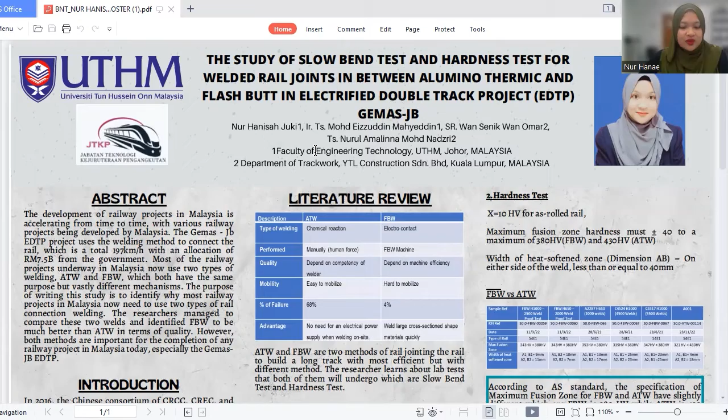First of all, I will start my presentation with the abstract of this project. The development of railway projects in Malaysia is accelerating from time to time, with various railway projects being developed by Malaysia.

The Gemas-JB EDTP project used the welding method to connect the rail, totaling 197 kilometers, with an allocation of 7.5 billion ringgit Malaysia from the government.

Most of the railway projects underway in Malaysia now use two types of welding, which are ATW and FBW, which both have the same purpose but vastly different mechanisms.

The purpose of writing this study is to identify why most railway projects in Malaysia now need to use two types of rail connection welding. The researcher managed to compare these two welds and identify FBW to be much better than ATW in terms of quality and time consumption.

However, both methods are important for the completion of any railway project in Malaysia, especially the Gemas-JB EDTP.

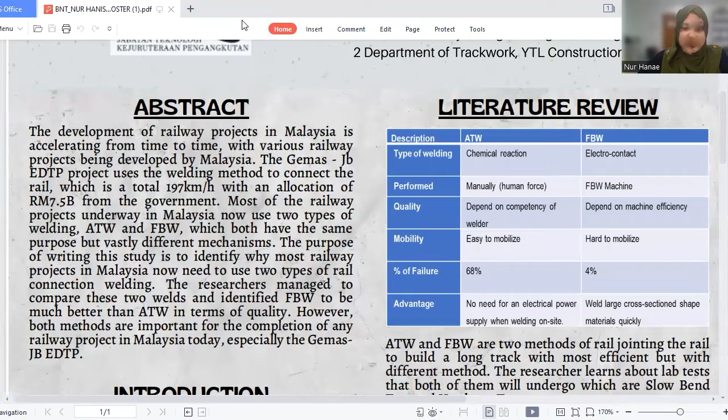Introduction. Nowadays, as for the transportation mode, there has been a move towards electrification as one of the main energy consumers, as electrical energy delivers a lot of environmental benefit due to the significant absorption of renewable energies in electric power systems such as KTM commuter.

In 2016, CRCC, CREC and CCCC won the contract to build Malaysia's first electrified rail link between KL and Singapore.

Electrical energy delivers a lot of environmental benefit due to the significant absorption of renewable energies in electric power systems. The Gemas-Johor Bahru line is the last piece of the current KTMB network to be modernized, and once finished, it will give a continuous connection from the Peninsula's Southern Tip to Padang Besar on the Thai border in the north.

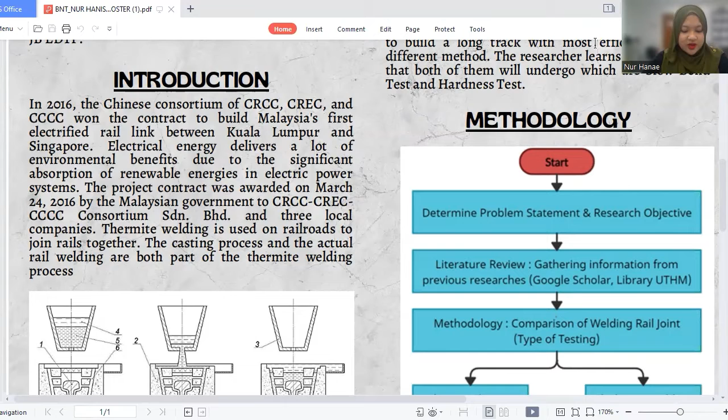The fundamental purposes of a rail in a track system are to provide a continuous, hard and smooth surface for train travel, to guide vehicle wheels along a specified track, and to sustain and transmit the load imposed by the wheel to a greater area of formation through sleepers and ballast.

Thermite welding is used on railroads to join rails together. The casting process and the actual rail welding are both part of the thermite welding process. ATW was a huge success from the start, known for its low cost. This technology is currently widely used for railway construction, maintenance, and modernization all over the world.

They have formulas to describe the extremely exothermic reaction between iron oxide and aluminum particles in alumino thermic welding. This figure shows the process of ATW: formation of the thermite mixture, pouring the molten thermite mixture into the mold, and lastly crystallization of the weld.

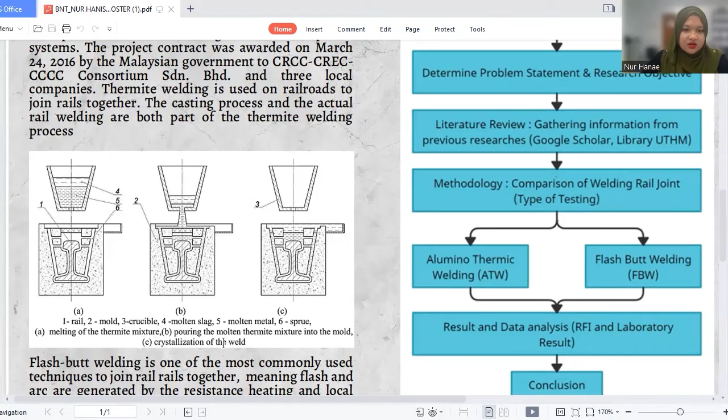Flash butt welding is one of the most commonly used techniques to join rail together, meaning flash and arc are generated by resistance heating and local heating caused by the contact of the rail. This contact electrification and flash generation is repeated a number of times until a melt layer is formed over the entire joint surface, and a weld joint is then obtained by rapid advancement and pressurization.

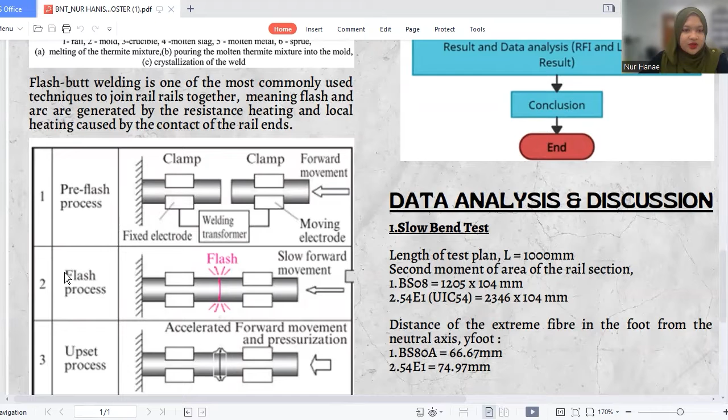This figure shows the process of FBW, which starts from the pre-flash process, flash process, and lastly the upset process, the accelerated forward movement and pressurization.

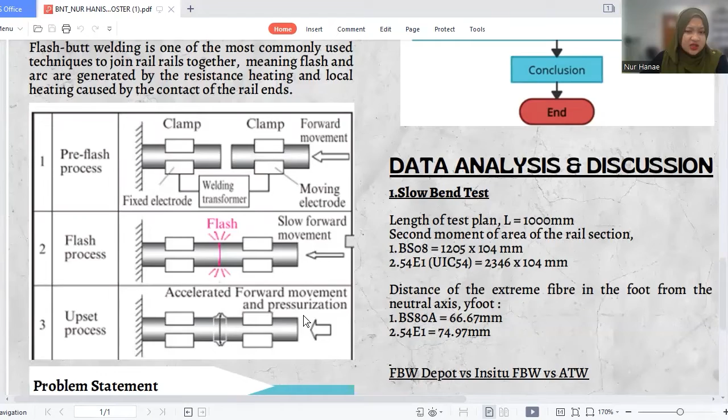Now we move on to the problem statement. Rail joint is the most important part in railway. Without better knowledge about rail joint, the excellence of the track may not be produced. There are various methods of the thermite welding process joint.

Types of welding that have been implemented in construction of railway nowadays include in EDTP Gemas-JB. There are two methods of welding that has been used in permanent track, which are Alumino Thermic Welding (ATW) and Flash Butt Welding (FBW). This paper is to identify why in this EDTP Gemas-JB project are needed two types of method welding rail joint to complete this project.

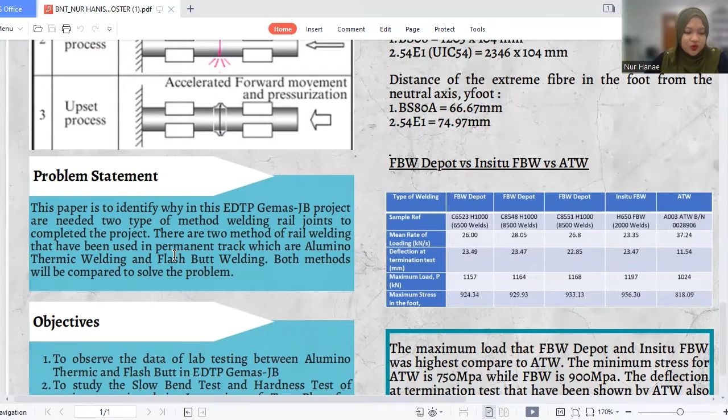Both methods will be compared to solve the problem. Now we continue with objective for the research.

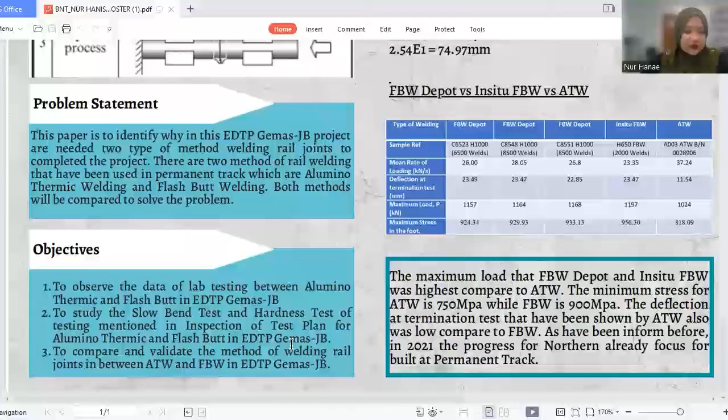First, to observe the data of lab testing between Alumino Thermic and Flash Butt in EDTP Gemas-JB. Second, to study the slow bend test and hardness test mentioned in ITP for ATW and FBW in EDTP Gemas-JB. And lastly, to compare and validate the method of welding rail joint between ATW and FBW in EDTP Gemas-JB. Okay, now we move on to literature review.

Literature review. A crucial component of the railway system is the rail joint. Local settlement occurs because the rail joints are less rigid and strong than the center. The rail joint must have the same qualities as the rails themselves in order to fulfill the purpose and provide constant performance. Alumino Thermic technique is used to join

lengthy strings of flash butt welded rail in the field, as well as to repair worn and broken rail, which is for maintenance. The welding is used on railroad to join rails together. Flash butt welding is characterized by a high stable quality of welded joint that are nearly equal in strength to the parent metal. This is the summary of the literature review.

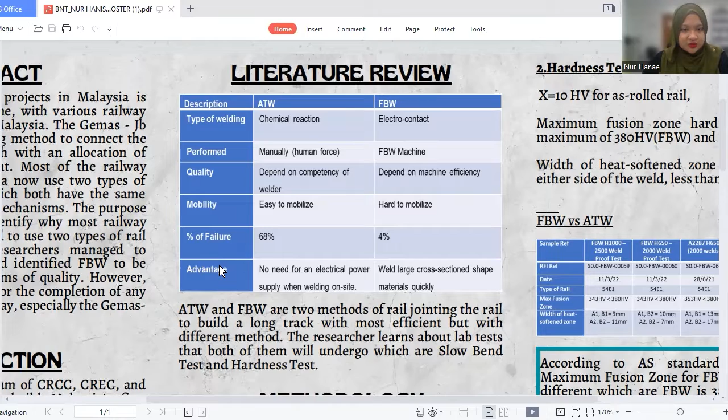I have compared type of welding, performance, how it performed, quality, mobility, percent of failure from literature review, and lastly, advantage. Based on study and research, both methods have the same purpose, which is to join the rail to build a long track most efficiently, but with different methods.

FBW had a lot of advantages in rail joint welding because it may weld large cross section shape material quickly, without the need for interface preparation, cleaning, and with adequate weld strength.

Before FBW existed or was used worldwide, ATW was the number one option for rail welding joint because the material for this method is easy to get and final cost for the welding is less expensive compared to FBW. It also needs no supply of current when the welding needs to be done on site. This method doesn't have any problem with any location the welder wants to weld.

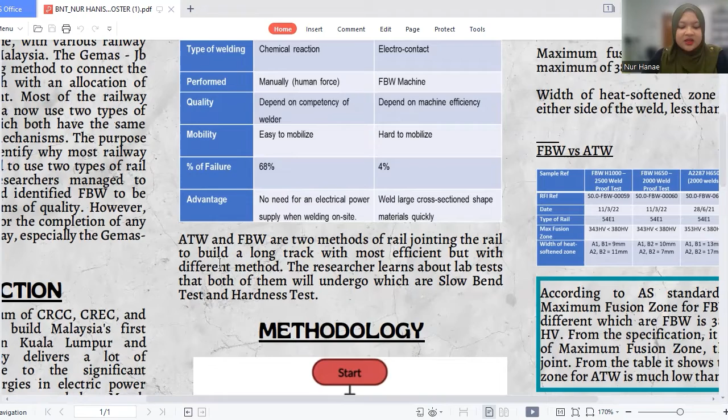To compare both methods specifically, the researcher learns about lab testing that both rail joint methods will undergo, which are slow bend test and hardness test. Both tests are included in test qualification for rail welding.

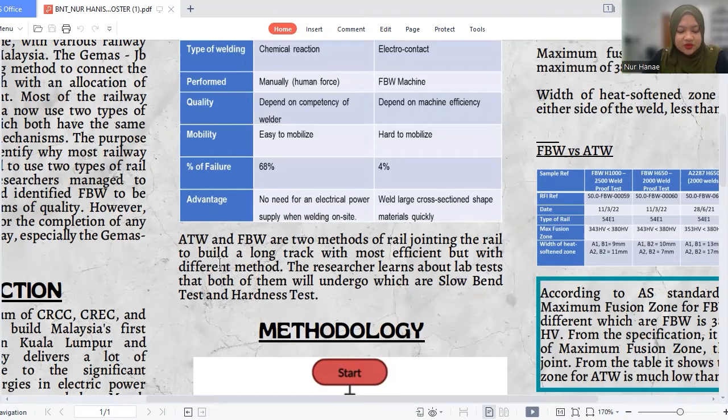Slow bend test is used to determine the quality of the railway, while hardness test is to determine the width of the softened zone and the maximum and minimum hardness in the heat affected zone and any asymmetry in the hardness distribution. Okay, next, now we move on to methodology.

Methodology will describe and discuss the planning and method of the researcher to gather the necessary data and information that will be used throughout the study. Here are my flow for my research.

The data of slow bend test that will be analyzed in this research are mean rate of loading, deflection at termination of test, maximum load, and lastly, maximum stress in the foot.

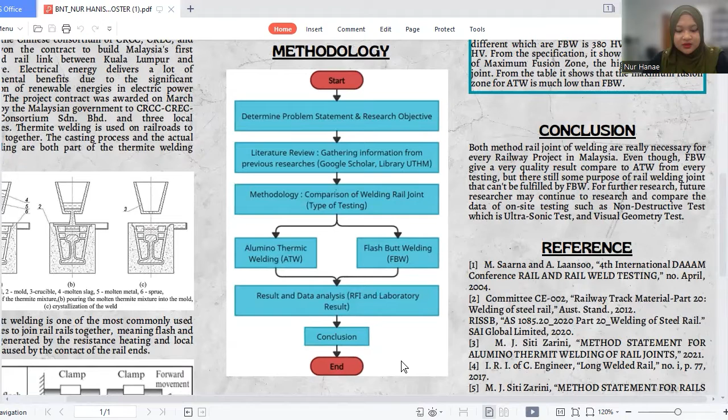As for hardness test, the data that will be analyzed is maximum fusion zone. The fusion zone is defined as the portion of the material that has melted. And next, width of heat softened zone.

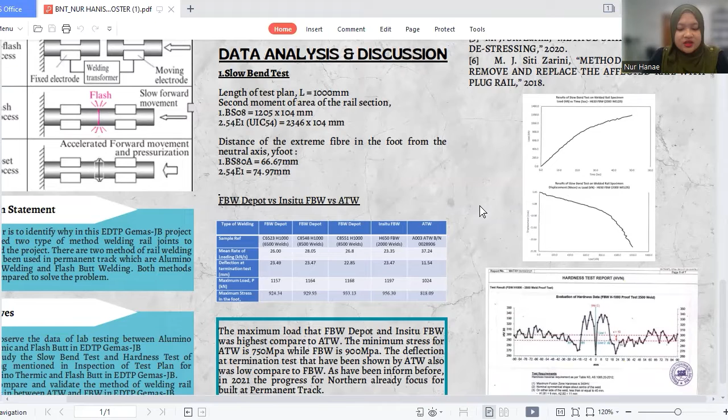Now we move on to data analysis and discussion. The data was extracted from RFI, which is request for inspection from this EDTP project. This research will only focus on permanent track since the northern area didn't do any ATW testing related to BS80A in 2021.

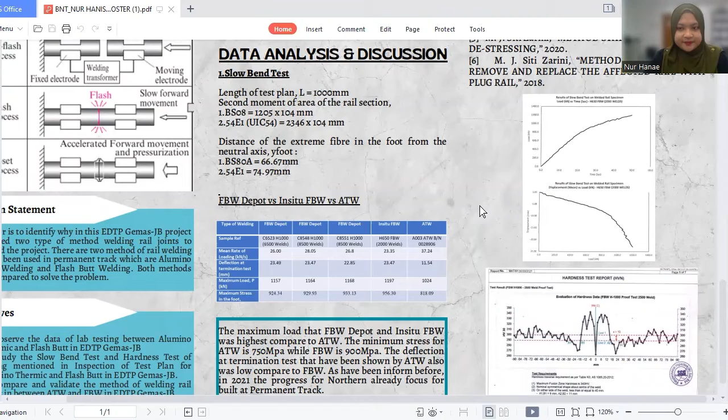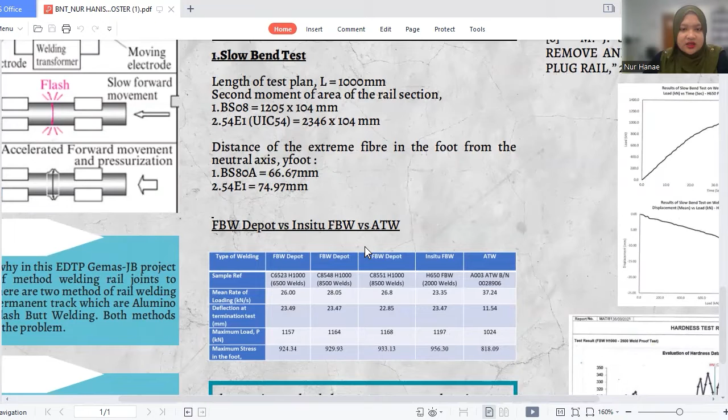The first, slow bend test. This is the constant for slow bend test according to Australian standards since we're doing joint welding for this project, use that standard. Based on the analysis here, clearly see that the maximum load that FBW depot and in situ FBW had the highest maximum stress in the foot compared to ATW.

The deflection at termination test was dependent on the maximum load that welding of joint can afford. The higher maximum load will produce higher maximum stress in the foot. Based on the standard, we can also compare that the requirement for minimum stress ATW is 750 MPa, while FBW is 900 MPa.

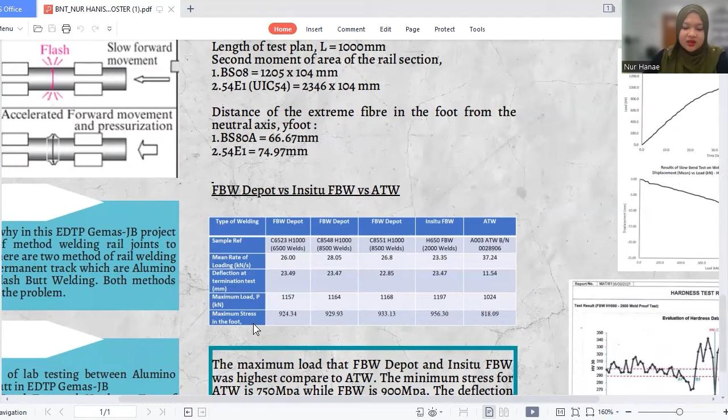It shows that FBW method is much more quality and long lasting compared to ATW. Okay, next we go to hardness test. In this project, there are several types of hardness tests involved for the qualification of FBW and ATW on site. The specification and qualification for this test follow Australian standard.

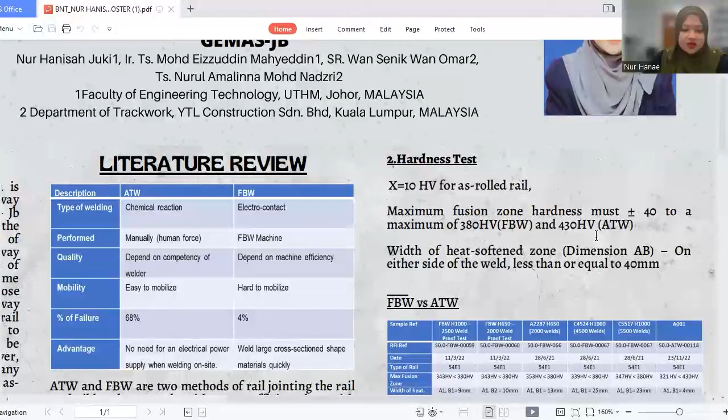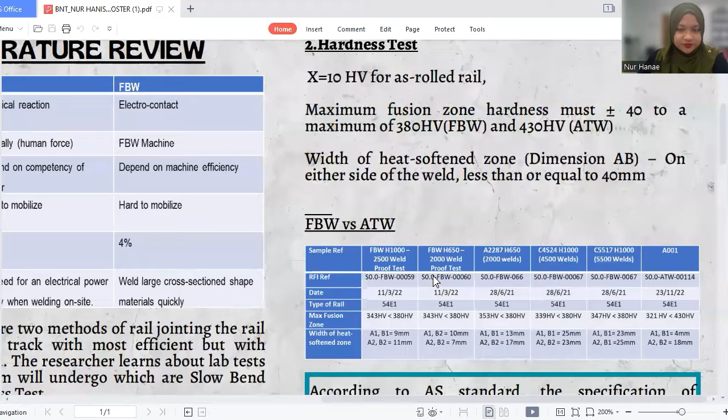According to AS standard, the specification of maximum fusion zone for FBW and ATW have slightly different values, which are FBW 380 hardness Vickers, while ATW is 430 hardness Vickers. From the specification, it shows that the lesser value of maximum fusion zone, the higher the quality of joint. However, from the table, it shows that the maximum fusion zone for ATW is much lower than FBW.

It may be due to the technique and competence that have been applied by the welder in this welding joint, which can increase the quality of the ATW joint.

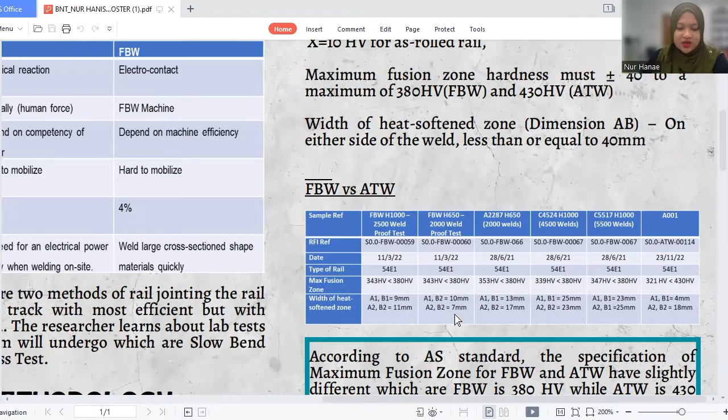According to AS standard, the specification of maximum fusion zone for FBW and ATW have slightly different values, which are FBW 380 hardness Vickers, while ATW is 430 hardness Vickers. From the specification, it shows that the lesser value of maximum fusion zone, the higher the quality of joint. From the table, it shows that the maximum fusion zone for ATW is much lower than FBW. This may be due to the technique and competence applied by the welder in the real welding joint, which can increase the quality of the ATW joint.

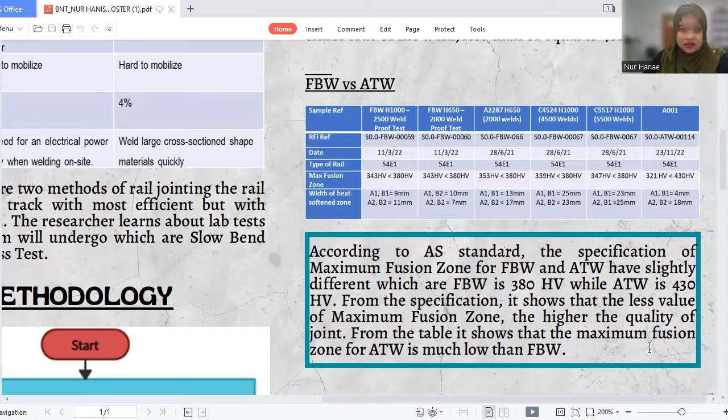Last but not least, conclusion. From this research, as for current technology in Malaysia, both methods for joint welding are really necessary for every railway project in Malaysia.

Recommendation from this research: in future, for any railway project, it might be used only one type of welding, or another method that has the same or more quality than FBW. In addition, maybe the material or procedure for ATW can be improvised to get much higher quality from the current project.

From this study, people will acknowledge and understand the method of welding, which is ATW and FBW, in a better way. In addition, engineers involved in railway projects will manage to differentiate between these two welding methods, FBW and ATW, in terms of benefits and performance.

By the end of this research, people involved will gain more knowledge and be able to improve implementation for future projects. For further research, researchers may continue to research and compare the data of on-site testing, such as non-destructive test, which is ultrasonic test, and visual geometry test.

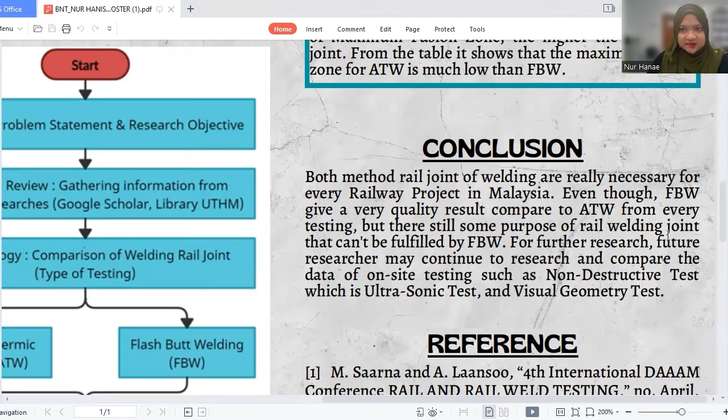So here are the lists of my references.

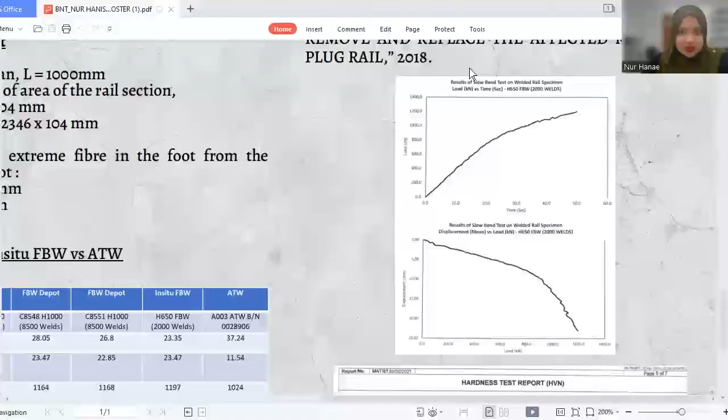And here I have attached an example of analysis. This is for the slow bend test, and this is for the hardness test report.